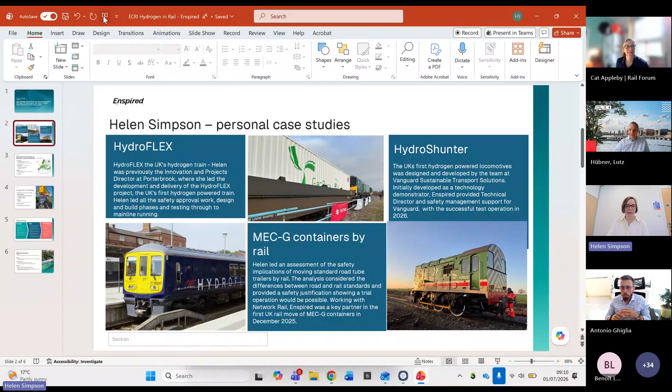Thanks, Cat. I'll just share my screen and hopefully we can see that. Hopefully that's working. Lovely. Perfect.

Thanks, Kat. So for those of you who don't know, I thought I'd put a few pictures of some of the hydrogen projects I've been involved in to set the scene and get us started today, thinking about hydrogen and rail. Cat mentioned the HydroFLEX project. There's a picture of it on the bottom left there. And I was really lucky to have been leading the team that built it and got that into service. So it's now running on the main line in the UK, and my team did all of that design, build and all the safety approvals testing to do that.

Since setting up Enspired Consulting, I've worked on the Vanguard Sustainable Transport Solutions project. There's a picture I took of their lovely HydroShunter. That's a 60-year-old shunting locomotive that has been retrofitted with fuel cell hydrogen technology. So I gave technical director and safety management support to the Vanguard team, and that's their hydrogen-powered shunter, which is now testing at the Severn Valley Railway in the UK.

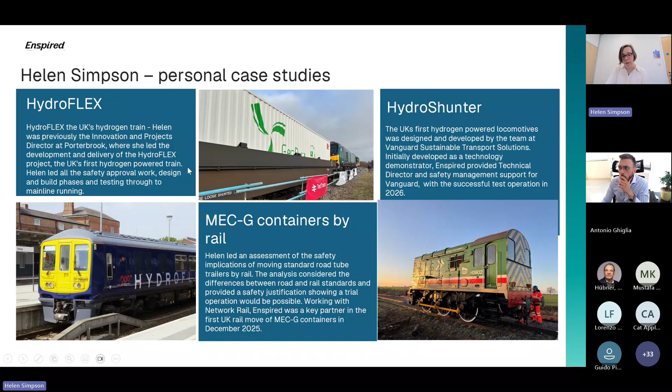And the final example was a project we did last year, looking at can you transport the MEC-G containers by rail, and what safety management and safety approvals do you need to consider that? So I led an assessment of all the safety implications and then worked with some freight operators in the UK to go through all their safety case analysis to judge the difference between what the MEC-G containers had been built to for road standards and what was needed for rail, providing a safety justification to show that that trial operation was possible. And that was working with Network Rail and Freightliner to do the first ever move of hydrogen in December 2025.

So what I wanted to talk about was to get some questions going a little bit, get you thinking a bit about the issues with hydrogen. So we've got quite a lot of routes in Europe that are electrified, but there are quite a number that are not electrified. So if we're looking at how to decarbonise the railway and we're moving towards net zero, and that is the objective, then we have to think, what are the options left to us?

So we could do some more electrification. That's potentially zero emission if we get a green energy supply, but that does need a high capital investment. So really we ought to prioritise the routes that are higher speed or higher power demands for electrification. So electrification has got to be part of the answer here.

We could do some more diesel trains. We've already got all the refuelling infrastructure already existing. It's well understood. It doesn't meet the net zero objective, and we've got both local emissions challenges with NOx and particulates, and also global level challenges with climate change with CO2 emissions.

So for many, government policy and direction of where we want to go, and also the investment market, is looking to move away from diesel products. So perhaps it's a solution in the short term, or a hybrid might be a solution in the short term, but it doesn't feel like that's going to give us the long-term solution.

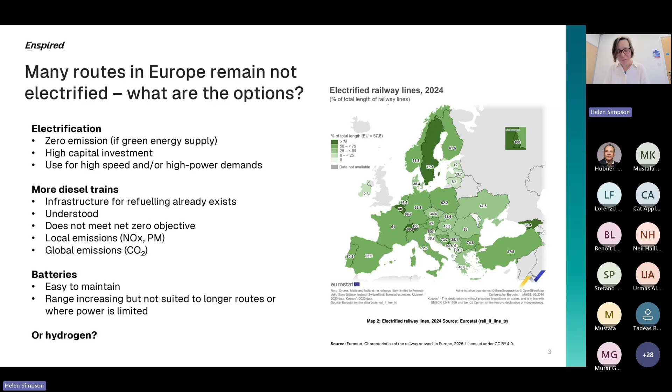So what are the challenges if we were to build hydrogen trains? So one of the things that's often quoted is the energy density. Hydrogen is a bulky, big gas. You need to compress it or cool it down to liquid hydrogen, very, very low temperatures, to effectively transport large amounts of it. There are technical challenges.

It's flammable at 4% concentration in air. It's odorless, colourless. It's susceptible to leaks, hydrogen embrittlement. It burns with an invisible flame in daylight. The fuel supply in the UK has been limited, so that's one of the challenges for the UK market.

And fuel supply, we've got to think about where we're going to get this fuel from. So both the availability, the cost is often quoted. So the kilogram per kilogram cost of hydrogen, and the logistics of getting the fuel to where it's needed. Then there are some safety and standards.

I know there are some emerging standards, rail standards, European standards on fuel cells in rail vehicles and hydrogen fuel tanks. And there's been quite a bit of thinking and work done on that, but they're really developing with the technology. So we have to think carefully through the safety management approach. We have to think carefully about standards.

And we've got a cost here that's changing from something we know. We've got diesel trains operating on the networks, and we're moving to something that's a bit unknown, and there is a cost in moving from one technology type to the other. So those are some of the challenges. I'm sure a lot of you will have come across those, and some of you hopefully have overcome some of those. But those are some of the challenges that get talked about with hydrogen trains.

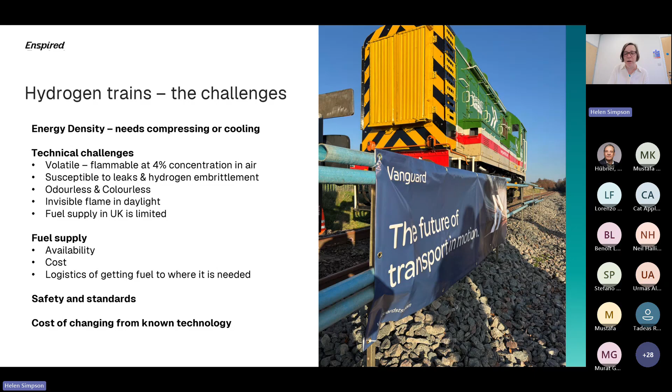But perhaps there's an opportunity gap if we think about that energy supply and the rail sector. So with the energy supply side, and we think about the national grid infrastructure, sometimes there are restrictions on where energy can be generated and where it is used. So geographic boundaries in the grid infrastructure. Batteries could provide a bit of a solution to that, but that's really restricted to short-term and more local geographic areas. It doesn't give you such a big energy vector.

And the energy sector are really looking for technology like hydrogen that allows you to store it, distribute it and use it elsewhere. But that is going to need transport logistics. The energy sector has got a drive from governments towards net zero and increasing renewable energy production. Energy buffers are going to be an integral part of that.

If you think about solar and wind energy particularly, the amount that you can produce at different times in the day or different days in the year varies, and therefore we're going to have peaks and a varying supply. The energy sector is looking for something that can adjust to that and cope with that buffer and those changes.

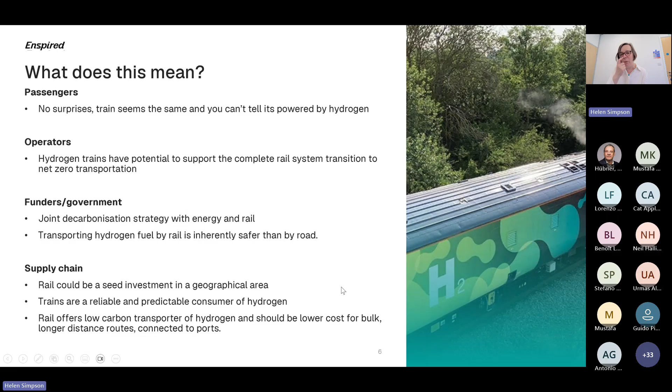So those were some of my thoughts. I hope that gives you some things that we're going to cover in today's session to help get you thinking of some really good questions to ask. We're going to, I think, have a look at some other presentations in a minute. We've got 3 more speakers who I know have got really great conversation points to start, and we'll move on to that. Stop sharing that one.

Right. So our first speaker is Lorenzo Miralles Ferrer from SENER, who is a project director. Lorenzo has over 25 years of international experience in transport infrastructure, managing complex engineering projects. He's a chartered engineer and has worked across Europe and Asia on major railway programmes, planning, design and delivering large-scale

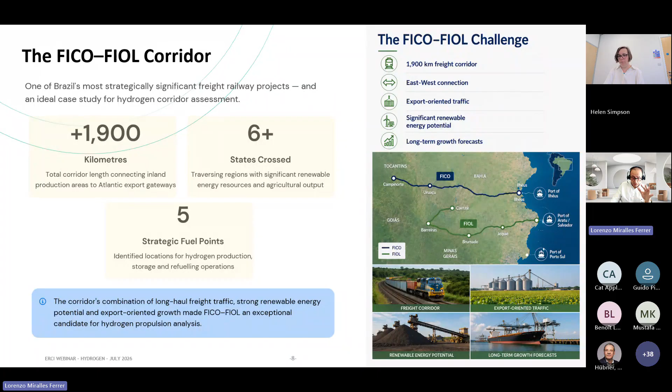High-level description of Hympulso as well. This second project is called Hympulso. The project receives funding from the government of Spain through IDAE, that stands for Institute for Diversification and Energy Saving. This is the translation. And SENER is a key member of a consortium together with Talgo, a rolling stock manufacturer, Repsol, oil and gas company, Golendus, Ingeteam, Optimus. They are technology companies, and the institutional collaboration of ADIF.

ADIF is the Spanish Railway Infrastructure Authority, so it's government. And this authority is fully committed and involved in this project. This project is still open and is expected to be finished next year. And we can say that for the Spanish government, hydrogen propulsion is one of the key innovation vectors. So ADIF's purpose, that means the Spanish government's purpose, is to find out whether hydrogen is a win option for some of their non-electrified lines, currently operated with diesel locomotives.

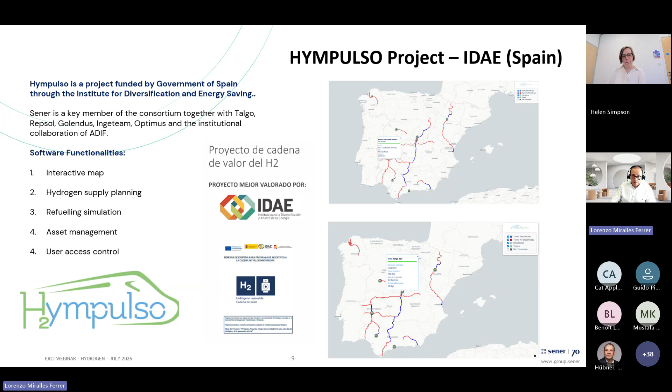There is this open discussion about which lines should be electrified or should be moved to hydrogen propulsion. I liked seeing that map that Helen showed in her presentation, showing the percentages of electrified lines and non-electrified lines. So, okay. In this project, our participation is focused on a comprehensive risk assessment of the whole system, from the production of the hydrogen to the operation, in a cost-benefit analysis that we are doing at this moment, and we have created a dedicated software for the digital management of the whole system, from the production to the operation and the refueling strategy.

Okay, more details. We can say that most discussions start with technology. So sometimes the question is, can hydrogen trains work? But the reality, thinking about governments, is that governments are asked a different question. They need to know whether hydrogen is the right investment for a specific corridor compared with other decarbonization options. That changes the entire assessment process.

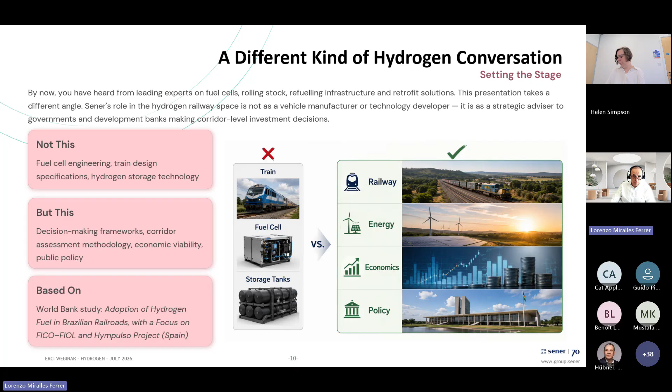When evaluating hydrogen, governments are not analyzing a train, the technology of the train. They are analyzing an entire transport and energy system. Okay?

I think it's good, these details of the FICO-FIOL assessment that we did. In the FICO-FIOL study, these were the 5 key questions that guided the assessment. For a better understanding, just to say that FICO-FIOL is one of Brazil's most strategic freight railway projects. The corridor connects inland production areas with export gateways in the Atlantic coast and crosses regions with significant renewable energy resources. This made it an ideal case for assessing hydrogen propulsion.

Important. Governments must also assess whether the regulatory framework is prepared for a large-scale hydrogen deployment. And I will put the focus many times in this concept. Hydrogen introduces new requirements related to safety, storage, transportation, emergency response, certifications, etc. And in many countries, we can say that regulatory readiness may become as important as technical readiness. A real challenge.

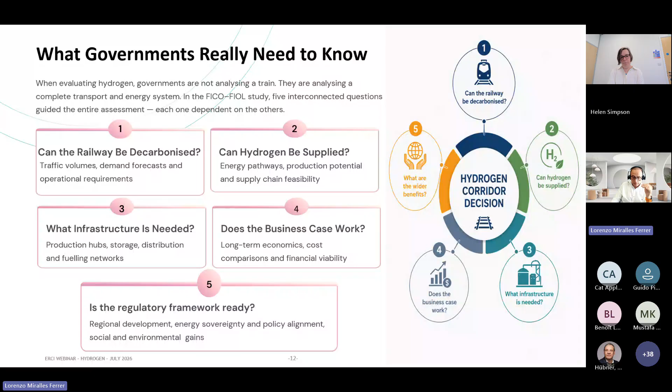So these 5 steps or key questions. Step 1, the starting point for the assessment is not hydrogen. The starting point is railway demand. Hydrogen consumption depends directly on traffic levels, longitudinal profile, elevations, loads, train frequency, future growth, etc. But without a robust demand forecast, there is no meaningful business case.

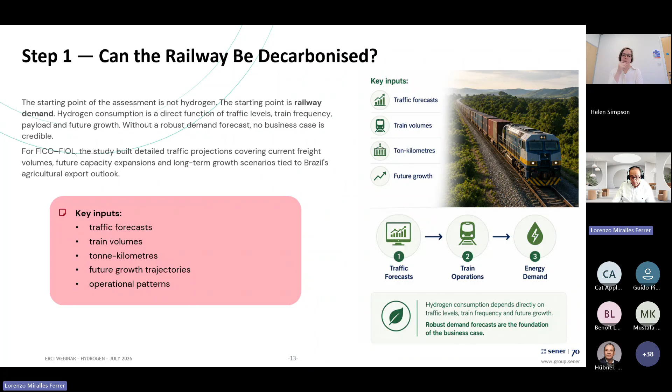Step 2, one of the most important findings was that the energy ecosystem matters as much as the railway itself. The study evaluated several pathways, including hydrogen, ammonia, and bioethanol. The objective was not to select a fuel first, but to understand which ecosystem could support the corridor in the long term.

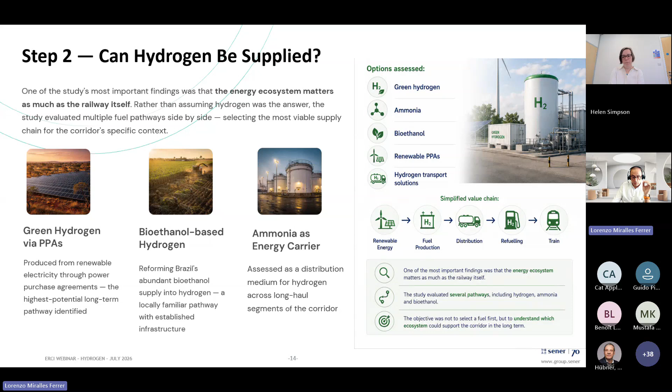We have seen an example in the previous slide, but some years ago, the main question was whether hydrogen trains could actually operate in the real railway environment. But today, the question is increasingly being answered through projects, through evidence such as Talgo in Spain, the project Hympulso, Alstom, the Coradia iLint, the Hydroflex, of course, Stadler's, etc. And there are other examples. These projects demonstrate that the technology is progressing rapidly. As a result, the focus of governments is shifting from the vehicle feasibility towards infrastructure, supply chains, transport policies, and long-term economics.

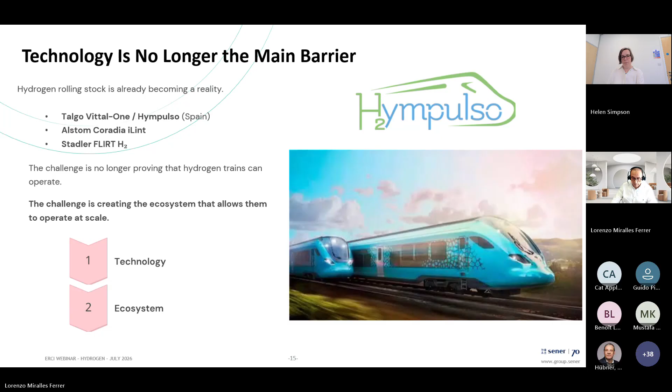Step 3, infrastructure planning goes far beyond the location of refueling stations. It includes production, storage, distribution, and future expansion. And in the FICO-FIOL study, the study identified a network of strategic refueling locations designed to support future growth while limiting infrastructure costs.

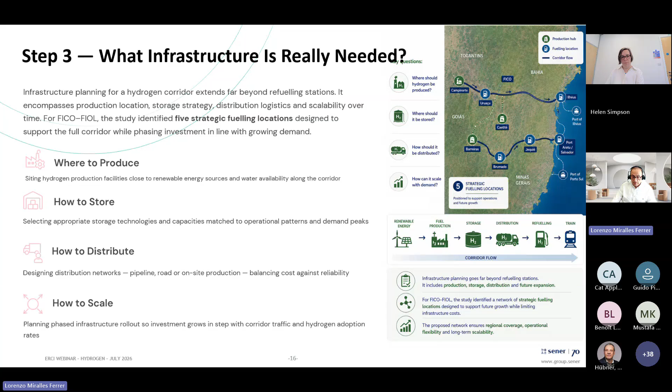Step 4, as we have said, technical feasibility alone is not enough. The key question is whether the economics work. Please bear in mind that the state of the art is changing every month, every year about the rolling stock, batteries, cells, etc. But anyway, the study compared different fuel pathways and found significant differences in the long-term performance. We conclude that the most promising option combines renewable hydrogen production with renewable power purchase agreements.

Perhaps the most surprising result was this. Brazil, maybe you don't know, but Brazil has one of the strongest bioethanol industries in the world. Yet, the analysis showed that the renewable hydrogen supply through green PPAs offers the strongest long-term pathway for the corridor. And this was not an obvious conclusion when we started the study.

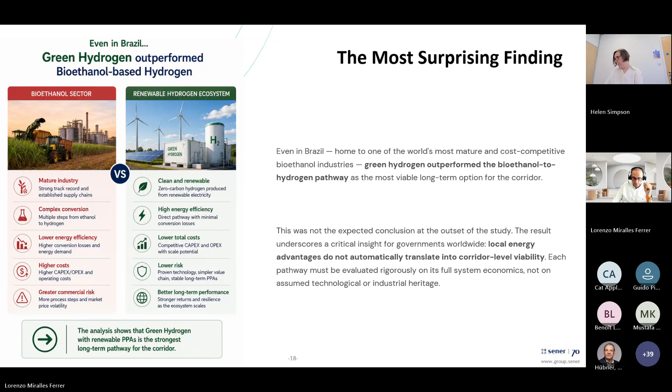So these lessons are not unique to Brazil. They can be applied to almost any freight railway corridor considering hydrogen today. And the key is to evaluate the complete system rather than focusing on a single technology.

In addition, and this is step 5, one lesson that is often underestimated is the importance of regulation. Deploying hydrogen at scale may require updates to safety frameworks, permitting processes, hazardous materials regulations, emergency response procedures, and others. Technology can move faster than regulation, so governments need to prepare both in parallel, and that's not easy.

And as a final reflection, hydrogen trains may be the most visible part of the system and the fancy ones, and we love them, but they are only one component. The real challenge is creating an ecosystem that combines transport, energy, infrastructure, and policy. Ultimately, the question is not whether hydrogen trains work.

A successful deployment is not only about trains, energy, and infrastructure. It also requires governments to establish the regulatory conditions that allow hydrogen to be deployed safely and consistently across the network. Risk assessments are essential, of course, but they are only part of the solution. Long-term success requires an enabling policy and regulatory framework. The final question is whether the corridor ecosystem works.

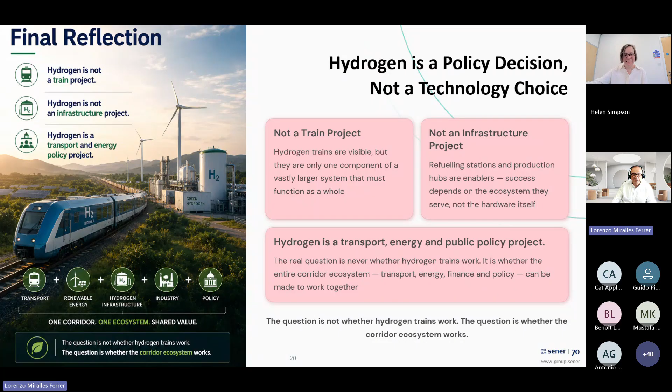Thank you, Lorenzo. That was excellent. Really thought-provoking. Some challenges there about getting the right question for government, I thought, was really interesting.

Okay, and next speaker is Guido Piccoli, who is a senior consultant and project developer with more than 30 years international experience in logistics, transport, mobility, energy transition, and territorial development. He's a recognised expert in design and implementation of innovative mobility solutions, transport policies, and has developed extensive expertise in specialist areas, including energy transition, renewable energy integration, and hydrogen ecosystems, working with the intersection of mobility, energy, and digital innovation.

Guido has built a strong track record in European projects, having successfully been involved in numerous projects funded by Horizon Europe, Interreg, CEF, Intelligent Energy Europe, and other EU programmes. And I think Guido is going to talk to us about what infrastructure is required to deliver a viable hydrogen fleet, and can that be easily scaled? Thank you, Guido.

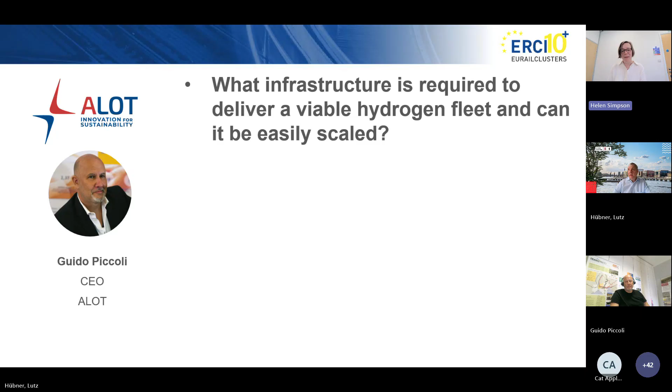Thank you very much for having me here. Good morning, everybody. I think you see my screen and you hear me?

Fine. So let's start from the words of Helen, obviously, which was introducing the ecosystem we are facing. And I would say I will not deliver much more than what was presented before by Lorenzo, because unfortunately or fortunately, what is true is clear and simple. So we know exactly which are the triggers or the problem we are facing. But I will give you also the vision we have from the experience in Lombardy, north of Italy, on the new project on hydrogen railway connection between Brescia and Iseo, Edolo. So from this perspective, what works, what doesn't, and in which way we can support decarbonization in the lines which cannot be electrified.

Just a few words also in my case about my company, ALOT. We are a consulting company supporting public administration, operators, investors in a logic which is merging sustainable mobility, energy and digital transitions, turning mobility transition into actionable strategy, project investment, and as mentioned before, also the development and coordination of EU funded initiatives. We are focused on the field of decarbonization in the railway sector, hydrogen mobility in general, and alternative fuel strategy. But what is really important for our side is the approach. We like to work on evidence-based analysis, stakeholder engagement, but also a really important point is the data-driven policy advisory, because sometimes we have strategies or ideas which are not based on scientific rigor, on numbers, and that is what we try to underline in many contexts.

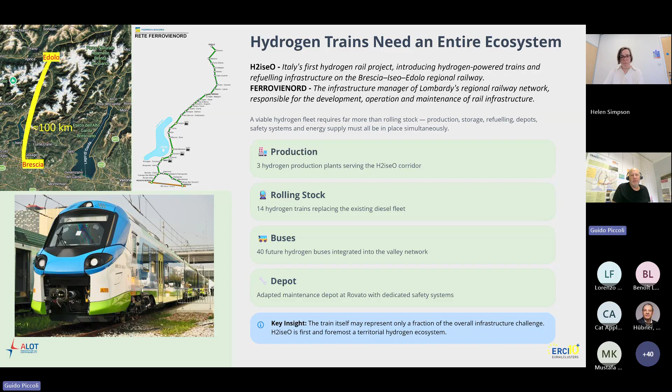Obviously the depot to maintain and to fill in Rovato all the trains, which are so peculiar and the only case in Italy, as I mentioned, this area that obviously needs a dedicated depot. And this experience obviously teaches us, like was mentioned before, how we have to start, and we can consider the railway aspect as a starting point. But first of all, we have to plan, and that was Region Lombardy doing at that time, the complex ecosystem on a different way of production, fueling, and obviously storage concern.

Another really important point about the history of this project is about the timing, in a way. We started with the first idea and political decision of project launch in 2020, so we're speaking about already 6 years ago. Long terms of feasibility study and business case and funding approval for about another 2 years, and then the infrastructure development and train testing that actually were approved recently in 2026, for operation expected for '27.

So it's clear how those aspects need also a public acceptance, because it was mentioned also by Helen before, hydrogen is not such a nice beast, a gas that people appreciate in general. Cannot be seen, cannot be smelled. If it's burning, you cannot perceive it. So it's really dangerous, even if it has long historical scientific rules in the industry for the production and utilization of hydrogen. So it's not something new in terms of how to handle, but the point of diffused hydrogen in urban heating or for transportation and so on may have some concern from the public opinion.

Therefore, we had also for Valcamonica a lot of committees against, committees asking for information, to be informed, worrying about different aspects, and obviously a lot of commentators in the newspapers saying why are you wasting our money on hydrogen, why can't you electrify the line, even if, as I mentioned before, it would be even much more expensive based on the logic of the tunnel infrastructure. So we had a lot of articles, a lot of committees, a lot of news against, in favor, not informed about why you started this, how you are going to produce it, where and which way. And then finally, if you look at the dates, recently, 1 month ago, we had the final authorization to start the service. That is real fresh news.

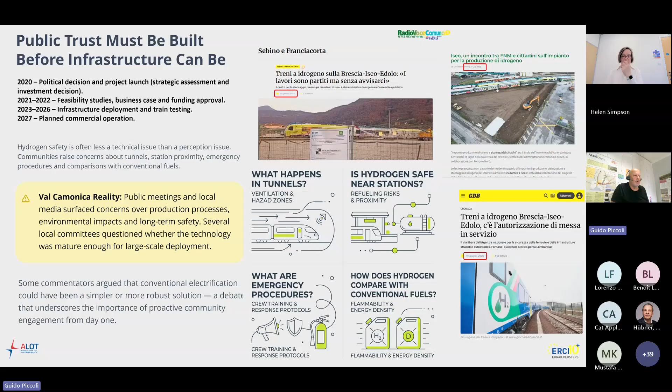But generally, as mentioned before, we have 4 main concerns: tunnels, ventilation, hazard zones, the hydrogen in the railway stations, which are obviously in the center of the cities, then which are the emergency procedures in case of accident while traveling, or for the cities and neighboring sites. In Italy, we have had very bad cases of events on the railways with transportation of hazardous goods. Viareggio was a really dramatic case. So the sensibility of public opinion about this fuel is really high and has to be comforted that it's safe, a sustainable solution also in social terms, as a conventional fuel.

Then, obviously it was mentioned already, the point about regulation, because regulation is much slower than technology, or luckily the other way. In the railway ecosystem, regulation is quite stable, let's say, not to say conservative, because obviously we start from safety certification, and now introducing hydrogen powered rolling stock is creating also a challenge for the rail world in order to approve the utilization, as we mentioned, just recently authorized for this operational aspect.

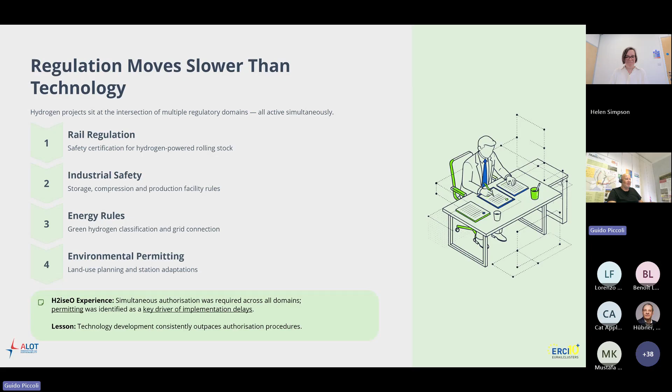Then we have the industrial safety for storage, for compression, for production facilities, the energy rules themselves about the pipeline, the distribution of hydrogen, green or any other, obviously still hydrogen, and all the environmental permitting for land use planning and station adaptation, because those are existing stations that we are retrofitting, reorganizing in order to use hydrogen. So in general, we saw how the simultaneous authorization was a challenge in order to provide all the features in different domains, and how permitting was really one of the key drivers for the delays of this implementation. So the lesson learned definitely is that it's not a challenge of technology, but we have to consider the authorization procedure in these terms.

Then from the economic scale, the general ecosystem of hydrogen. We are always aiming for a hydrogen valley, where hydrogen valley simply means a microgrid where I have the energy to produce hydrogen, I use the hydrogen, I have a lot of clients for the hydrogen production in order to scale down the price, to scale up the efficiency, the sustainability, economic sustainability.

So we have to consider that the railway cannot justify hydrogen infrastructure. No way. It can be the starting point, it can be the anchor customer, but we have to create an ecosystem around, because the uncertainty of the cost, both of the CapEx, so the investment in electrolyzer and storage system, which may decrease if we diffuse more, is an unpredictable element when we have such a long planning project. The same as the OpEx aspect, so the production of hydrogen.

So to reduce this unpredictability, to reduce the uncertainty of those investments, it can be solved in a way by combining with demand options. So including alternative demand options can be of really great importance in the planning of those projects, beyond the railway aspect itself. That was also a challenge, as I mentioned before, including hydrogen buses, including other uses of hydrogen in the territorial ecosystem.

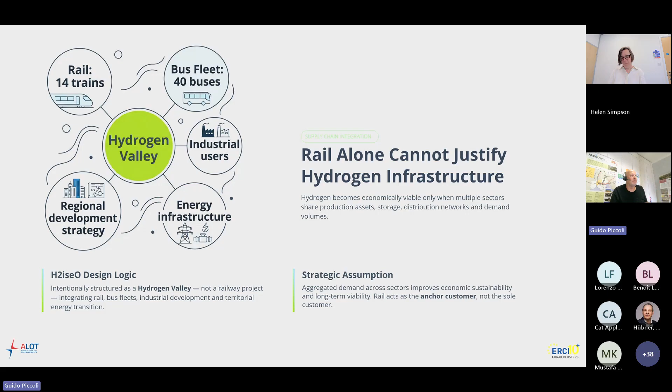I'm moving to the conclusion, but just to sum up some main aspects. So what we really believe from this experience in Lombardy is that the real challenge, the real test, is the scaling, not the feasibility. Technically, we know how to handle hydrogen, we know how to develop the production, the railway system, and so on. The problem is how can we create a pilot, an example that can be replicable, feasible also in other locations, transferable, to learn what the lessons learned can be.

First of all, stable supply. This is really the biggest challenge at the beginning, because when we speak about electricity or fuel, diesel, it's a day-by-day business. We have a fuel station, we have a grid to provide the electricity, so it's nothing to invent. In the case of hydrogen, we have a big challenge. Green hydrogen is not available. So one proposal is to decouple green hydrogen and hydrogen use. So let's start to use hydrogen. Doesn't matter which hydrogen, because then at least we can create a demand, a precondition for green hydrogen demand. But it is really important how to work to create a stable supply of hydrogen, and green hydrogen particularly as the future aim.

Then the predictable cost. As I was mentioning before, CapEx and OpEx are really two open points. We have a lot of providers proposing service contracts, supply contracts for hydrogen, but the price is not yet predictable. So we can agree on the quantity, but from the economic change, the development, the scale of the cost, we do not yet have a clear picture of those costs, and that again creates uncertainty in the different projects and acceptance among different players and decision makers.

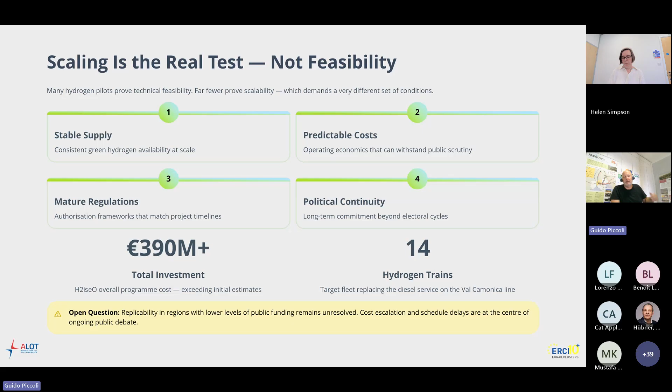So replicability in different regions, particularly the ones having low funds or low public commitment, is really hard, and the escalation of the cost and the time for the debate on permission and regulation may increase a lot, and therefore reduce the enthusiasm for this novelty on the transportation market.

So what the Val Camonica experience teaches us is that hydrogen trains can definitely be integrated in the railway system. There's no question about that. We have other examples around Europe. Rail can be, as I mentioned before, an anchor customer for infrastructure investments in hydrogen. That is really important, because then we can consider it one of the bricks for other investments in hydrogen, the utilization, the production. And hydrogen can connect mobility, energy, industrial policy. It's really important also to have a kind of lobbying with other potential users, particularly industry, which has the highest potential demand for hydrogen.

On the other side, what's still open? We do not have a continuous, stable supply of green hydrogen, and particularly the cost is not yet competitive, not stable, not at big scale, therefore a higher price.

We have struggled on the timing, on the implementation timelines, and therefore how to reduce them, as I explained already before. Still, multi-stakeholder involvement creates problems because we do not have the same priorities. How this model can be sustainable everywhere and not only in a specific context, how to diffuse this kind of logic in the planning, and in general, how we can compare the solution of hydrogen to electrification and battery alternatives,

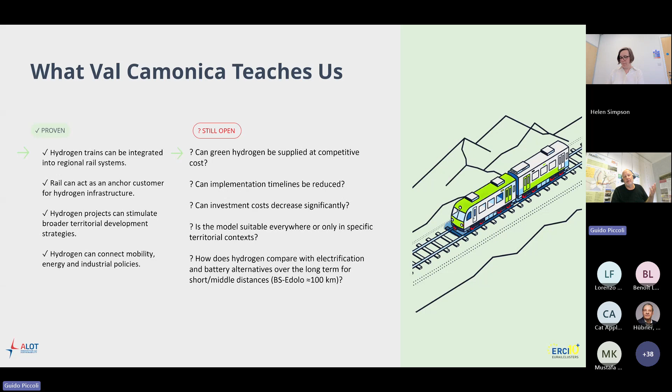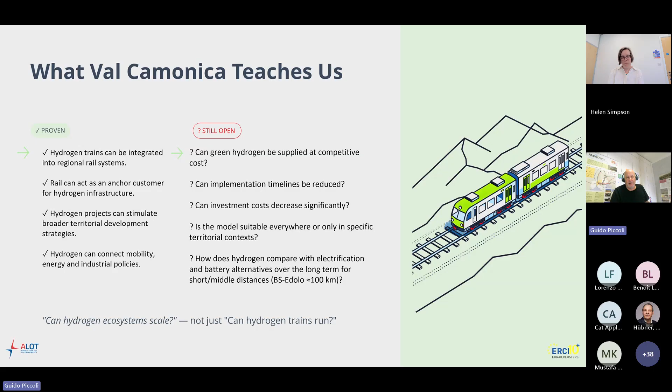particularly for a short line, 100 kilometers, when we have hybrid diesel-electric or fuel-electric trains, fuel battery trains, which may already cover this distance, maybe with fewer problems and less investment. But in general, the final statement from my side is: how can we scale the project? The problem is not to run the train, but really to scale up this project in other areas and apply it in a continuous way. Thank you very much from my side about the experience I presented from Lombardy region.

Thank you, Guido. That was excellent. I really enjoyed hearing all about those scalability challenges.

They were really fascinating. Okay, our third speaker is Antonio Hilliard, who is the president of CITAV and has been with the company for 5 years, having got a master's degree in mechanical engineering, and he's the third generation majority shareholder, as well as the head of research and development at CITAV. Antonio is going to be talking about why we should think about the conversion of equipment to hydrogen as the first option for rail equipment, specifically looking at hydrogen in shunting environments.

We cannot hear you at the moment. Maybe you have to unmute. Antonio? I'm sorry, can you hear me? Yes, better. Okay. Please proceed. Can you see also the presentation? Yes. Okay. All is good. Okay, thank you very much.

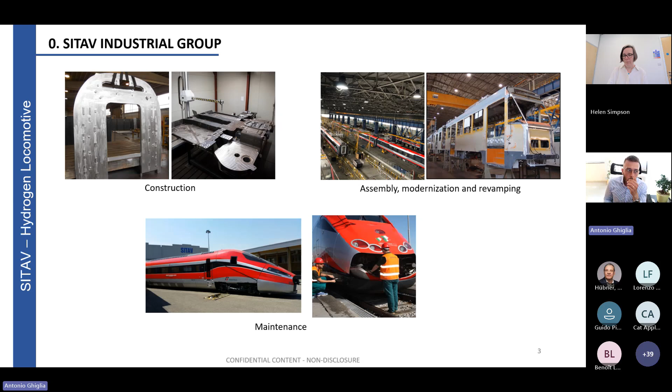so on. Going on and trying to explain our idea of a hydrogen solution for shunting, especially about revamping of existing locos, I would like, first of all, to explain why revamping and reconstruction can be a good solution for this type of product. Shunting activities must be cheap, and so the rolling stock used for these activities has to be as cheap as possible, and reusing a locomotive already existing can be a good way to save money.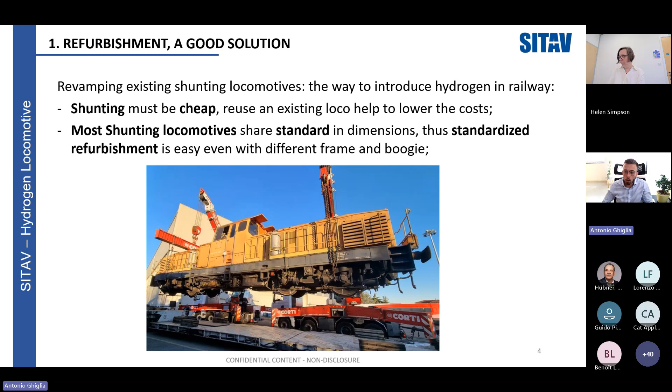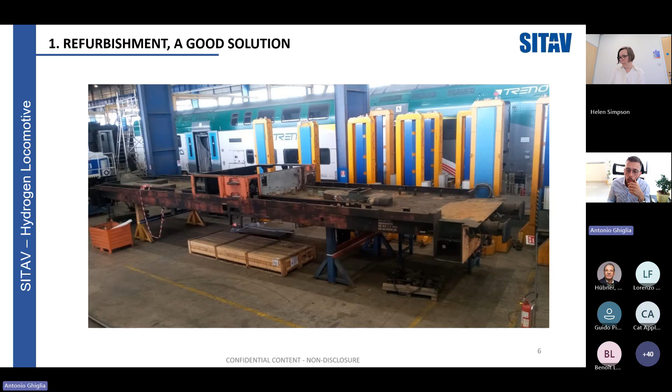On the other hand, shunting locomotives are quite standard in dimension and shape, so it's easy to find a design and a solution to standardize the type of refurbishment, maintaining just the frame and the bogie of the old loco. So when we speak of refurbishment, we don't mean just an upgrade, but a complete reconstruction of the loco. Just to be clear, we take the old loco, then we dismount everything on it. We maintain just the frame and the bogie, and then on this frame we construct and build the new loco with new systems and new technology,

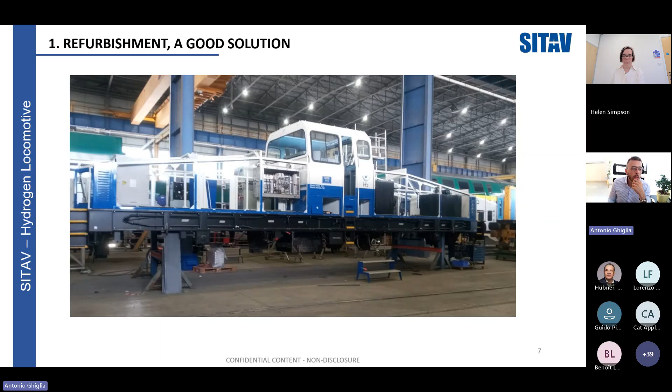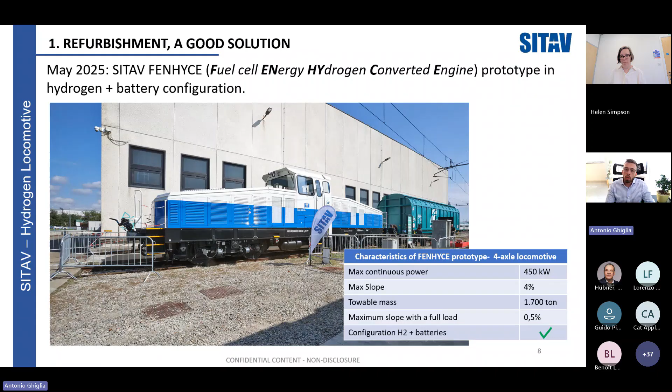so that the loco is practically new, and the final result of our experience on hydrogen is this. We developed a running prototype able to meet the regulatory requirements of the Italian railway system. We presented our prototype, our solution, last year, and in this case it is strictly based on a revamping, as you can see, and the solution is a hybrid solution that uses hydrogen and battery.

Hydrogen is used thanks to a fuel cell power system to bring the energy to the whole locomotive, and the batteries are used to face the power peaks and the braking phase, so that we can recharge the batteries while the loco is slowing down. We were focused also on the type of storage to use. We decided to use an innovative system based on metal hydrides, and this type of storage allows us to maintain the pressure as low as possible. We are speaking about 35 bar of pressure inside the storage, and this configuration is able to guarantee the maximum efficiency working condition and, at the same time, the minimum fuel consumption.

This solution is a specific solution for shunting activities, because we think that this type of activity is the perfect one to start to introduce hydrogen in railway. This is because shunting yards and harbors are typically not electrified, because you have cranes that work around, and it's not possible to have the metal wire of catenary over your head. So the loco has to be self-propelled.

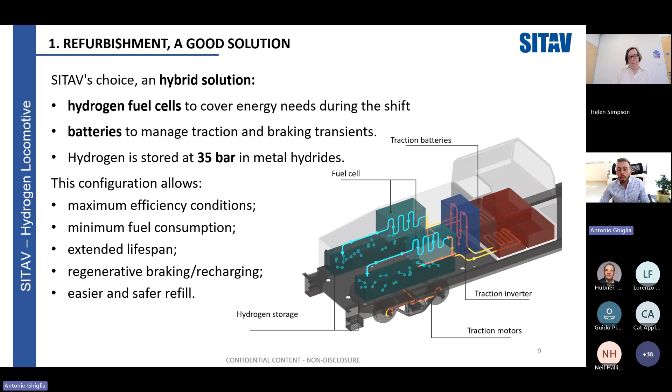So going on, speaking about why shunting activities are for us the best starting point. Shunting activities are typically characterized by high peaks of power to push and pull the wagons, but at the same time a low energy consumption, because the running time is not so long. There's not a huge amount of time at high speed. We have a maximum of 30 kilometers per hour.

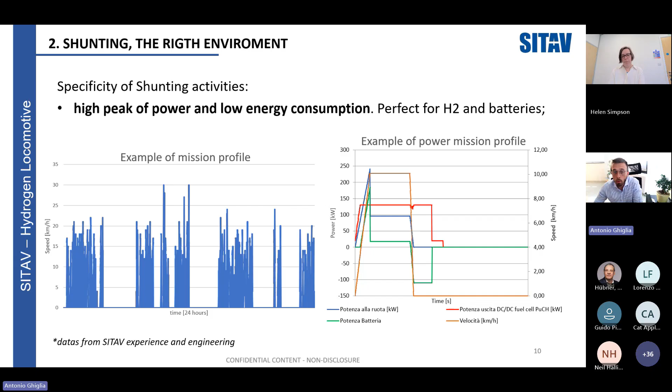And this mission profile allows the hybrid solution to use, as I said, the batteries to face the peaks of power, and at the same time the fuel cell system to charge the batteries and provide the energy that the loco needs for the shift. And shunting activities are done in confined areas, typically. At the same time, in urbanized contexts, typically harbors are close to big cities, but at the same time, they are closed areas.

Harbors are strategic hubs where trains, ships, and trucks meet. So it's a good place to start to introduce a new energy carrier like hydrogen, using low pressure for the storage. We can do the refill of the loco just with a truck that brings the gas at 200 bar. And in Italy, this is allowed by the regulation. So every day in Italy, there are trucks that bring hydrogen at 200 bar. So it can be a good, easy and safer solution to start to use hydrogen.

And as you can see, in Europe, there's an expectation for an increase in the use of hydrogen from Antwerp in the north of Europe to Livorno in Italy, in the southern part of Europe. This trend is increasing. So considering these two aspects, the environment in which shunting activities are done and the type of rolling stock used there, we believe that a shunting loco powered with hydrogen can really be the first step to introduce hydrogen as an alternative solution to more traditional energy carriers.

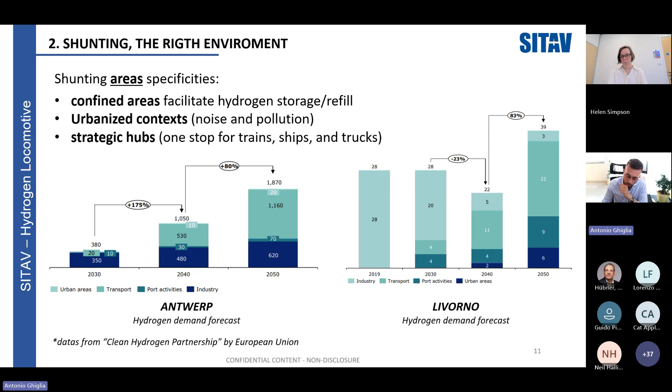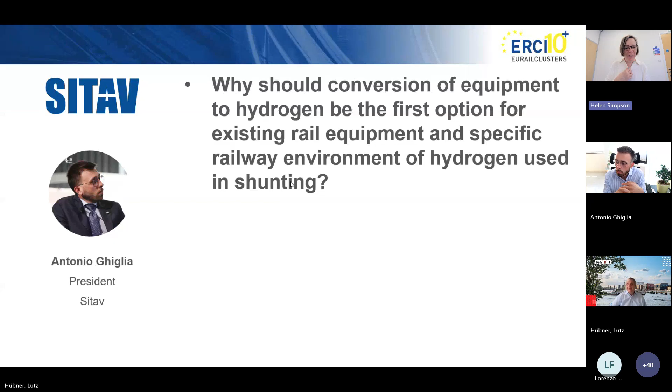So, thank you very much. I'm here for any questions. Thank you, Antonio. That's excellent. Right. Well, I think there's going to be a lot of questions. I can see there's loads going on in the chat. So if you have got other questions, please do add those in. Lutz, shall we start with the questions in the chat? I already summarized all the questions coming from the chat to slides, and at the moment I have 4 slides. We're going to be busy then, aren't we? Okay, so I'll try and group these together because I think we've got people on here that could talk all day about this topic, so that's great. But we'll try and manage the time a little bit. So shall I start going through these questions for you?

Yes. Okay, so one to kick off with: is the increasing cost of diesel fuel a big enough driver for national networks to seriously consider hydrogen? Well, one of the things we've heard consistently in all the presentations today is that it's a hydrogen economy, there's a hydrogen valley, we need lots of different sectors to come together. And whilst diesel cost increasing and hydrogen fuel costs reducing will help the business case, you need a lot of other things to come together. So I think that's kind of been talked about today.

Right, Lorenzo, from your experience, what are the key criteria governments use to assess whether hydrogen rail solutions are viable for freight corridors? Okay. Well, I've explained it in the presentation, I think, but yes, a government assesses the feasibility of a rail corridor by looking not only at a specific technology. They are looking at the complete system. And we can summarize the key criteria in freight demand and traffic forecast, feasibility of hydrogen supply, the required infrastructure, long-term economic performance, and the alignment with energy and regulatory policy, and everything comparing hydrogen with other alternative decarbonization options, of course.

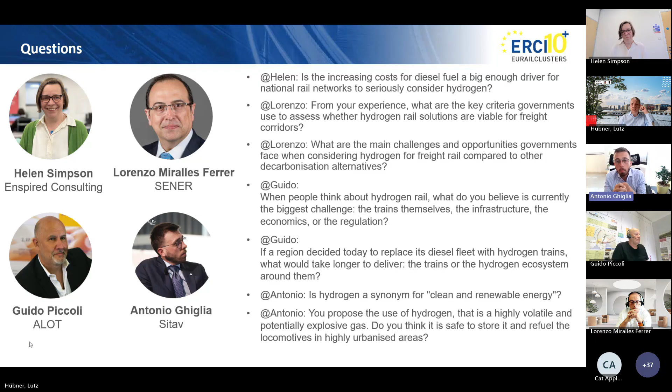So yeah, it is an explosive gas, but we know other gases that are potentially explosive and dangerous, and we use them every day. So I think we just have to learn how to deal with this new technology. But I don't see a specific big problem with hydrogen gas. That's my experience as well, Antonio. You just have to think carefully about it and learn how to be around it. Yeah, exactly. Okay, so some more questions.

Do you think hydrogen gives countries energy independence? What or which components in the system can prevent this, such as rare earth metals for very critical technology? So one of the things that's often talked about with the hydrogen energy sector is giving a country energy security. So if you're making more renewables and using that to make hydrogen, you're a little bit more secure in your energy supply as well.

But the second part of that question is the rare earth metals. There are a few in fuel cells, but most hydrogen trains also have a battery, which is where you'll see more of the rare earth metals being used, and that's a far bigger problem than just hydrogen in rail. That's how the supply of rare earth metals is being used in battery technology, and what we're using batteries for. So I'm going to slightly duck that question because it's a little bit more complicated. I think we might need another 2 hours to explore that, but it's an excellent point made.

Do we see a trend to reduce the cost of supplying green hydrogen, and which countries are capable today? I might ask some of my fellow presenters to help with that, because I know some of the countries we've been talking about in the projects have really made some good progress. The production in the UK is improving, and green hydrogen costs are dropping considerably in the UK, but I don't know whether any of the other presenters wanted to talk about their countries and the different relative costs of green hydrogen. Are you seeing a trend in reduction? Lorenzo or Guido? Okay.

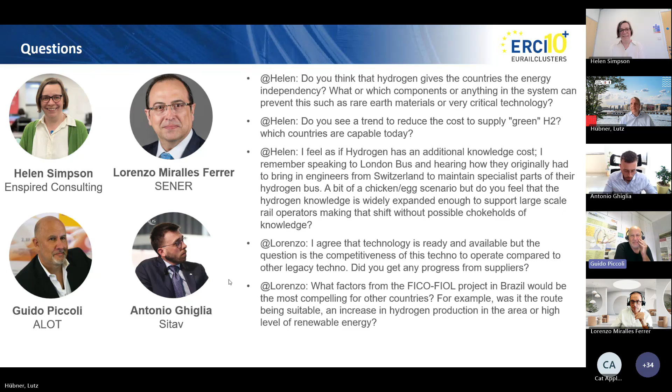The problem is that on one side, we have a single case, a pilot test, proving something in our countries, like my example, the one in Spain, and so on and so forth. Then we see that those are still proof of concept cases, I would say, where we can get some metrics, but then we need at national level at least a common vision, a decision.

So we have single pilots, then we need, whether for national level planning of local public transportation or longer distance, a decision concerning the non-electrified lines to move towards hydrogen as the entire market. That kind of decision may create a demand for hydrogen, because then the producers, the manufacturers, say, okay, I see the option to produce a certain quantity, both equipment-wise, technological-wise, and hydrogen-wise. This is a really important point.

If we have at European level or at national level this kind of decision, then we can open the market, because that is coupled with the other issue, industrial decarbonization. If we can place these two kinds of decision, it's policy making more than investment making, then we can open the market, because then we couple the demand of industry with the location of the railway fuel stations. Then we create the logic, the seeds for the hydrogen valleys.

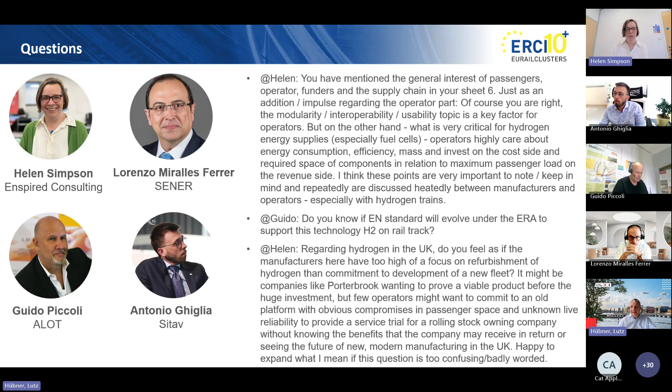Guido. In the UK, several hydrogen manufacturers do not progress without the rail sector committing as an anchor for almost the entire production. Is that the case with other industries, and might we need to increase hydrogen use to reduce the responsibility of rail being the anchor for new developments?

It's a good question. Well, again, from my experience in hydrogen diffusion in general terms, we have three sectors, you know already: heating systems at urban level, mixing with other fossil fuel solutions, mobility, and industrial decarbonization, besides other mixes where hydrogen can be used for ammonia or other industrial usage.

So for me, the key player, the biggest sector, is industrial decarbonization, the one every nation should aim at as a first target for the demand of hydrogen. So we need this kind of policy supporting industrial decarbonization to have the biggest user of hydrogen in place. Based on this, we can then open the point about mobility as a second pillar, or urban heating systems. That is, for me, a strategic point of decision.

Otherwise, mobility itself is too scattered, we have too many users, but we don't scale the quantity of production for pure mobility usage. So we need to start from industrial decarbonization, and then cluster together other usage in the logic of a hydrogen valley, having there also the refuel station for buses, for trains, for high demand energy usage and mobility.

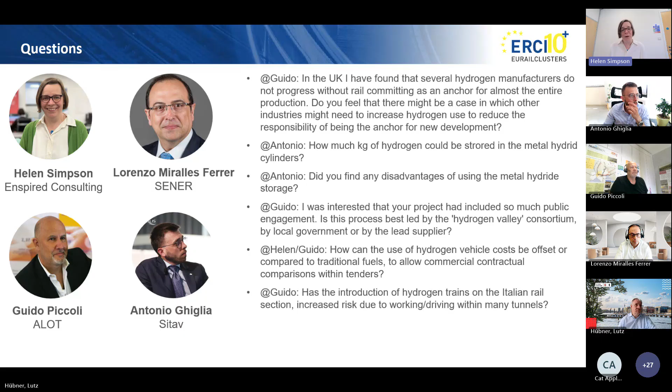Because the safety conditions can also provide. You have to go through a common safety method for the introduction. Absolutely, for your hydrogen trains anyway. So that will include all the risks of working in tunnels anyway, won't it?

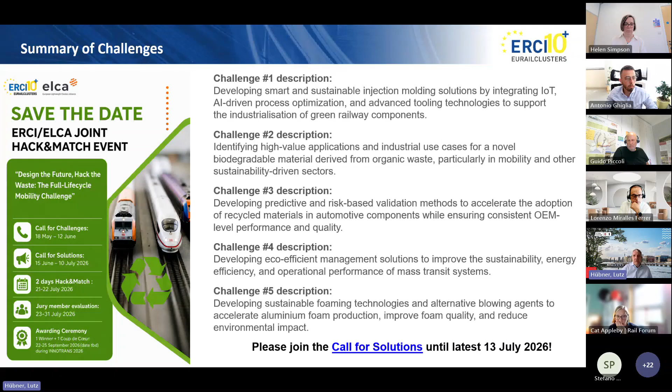Also at the InnoTrans in Berlin will take place the awarding ceremony of this year's ERCI Innovation Awards. We will have 3 prizes: the best SME, the best large enterprise, and the coup de cœur, special prize of the jury. We have already 29 applications under evaluation, and we expect the result by the end of July. The jury is an international one. Every cluster had the chance to nominate 1 jury member, in total 10 or 11, and then we will see what will happen.

So, InnoTrans is a good keyword. ERCI will be present also during the InnoTrans. That means certain members of ERCI are present with their own booths or parts of joint booths in several locations at the InnoTrans. And we are also collecting some interesting program or agenda points or events which are taking place at these several locations, and we will keep you informed on our ERCI webpage what is going on with a European perspective or with an ERCI based interest.